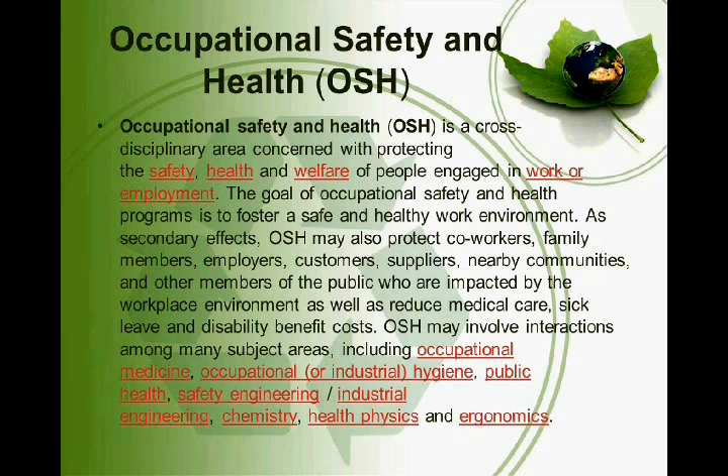Occupational health and safety is a cross-disciplinary area concerned with protecting the safety, health and welfare of people engaged in work or employment. OSH may involve interactions among many subject areas including occupational medicine, occupational hygiene, public health, industrial engineering, chemistry and health physics.

Steps to maintain HSE&S in the industry. There should be a program administration, and the supervisor is the key to safety success. The role of safety coordinator should be chalked out. Accident reporting should always be done. Accident investigations should be thorough.

Periodic workplace surveys like daily, monthly or yearly should be followed. Hazard communication program should be installed. Safety activity reporting should be done. Hazardous waste disposal should be ensured. New employees orientation briefing should be done before they go to the field.

Since 1950, International Labour Organization and World Health Organization have shared a common definition of occupational health. It was adopted by the joint ILO/WHO Committee on Occupational Health at its first session in 1950 and revised in 1995. The ILO published a standard in 2001 which is similar to OHSAS 18001.

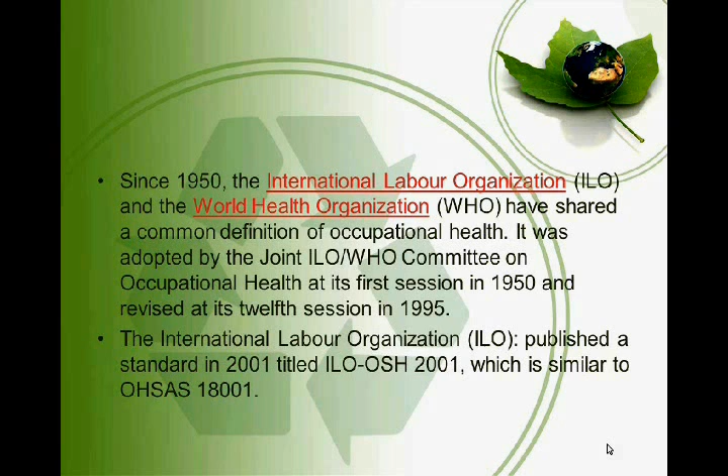We have many government organizations and laws all over the world that ensure that HSE&S are followed by the industries. Some of the very well-known government organizations are Congressional Office of Compliance US, Health and Safety Executive UK, Korea Occupational Safety and Health Agency South Korea.

Likewise, the laws are Indonesian Act number 1/1970 about occupational safety and work 1970, Occupational Health and Safety Act 1991 Australia, and Occupational Safety and Health Act since 1994 in Malaysia.

From rain boots to parachutes to blue jeans and heart machines, there is perhaps no other industry that affects our lives more than the chemical industry. In fact, more than 96% of all manufactured goods are directly touched by the chemical industry. Chemical production has a wide range of hazards requiring different levels of control to keep companies and their communities safe. These hazards range from virtually zero for some products to very serious for others.

The good news is that environmental health, safety, and security programs exist to give businesses a way of verifying that they're manufacturing as efficiently, effectively, and safely as possible. This can include meeting federal regulations or reducing pollution levels. Multinational manufacturers can devote significant resources to implement their programs.

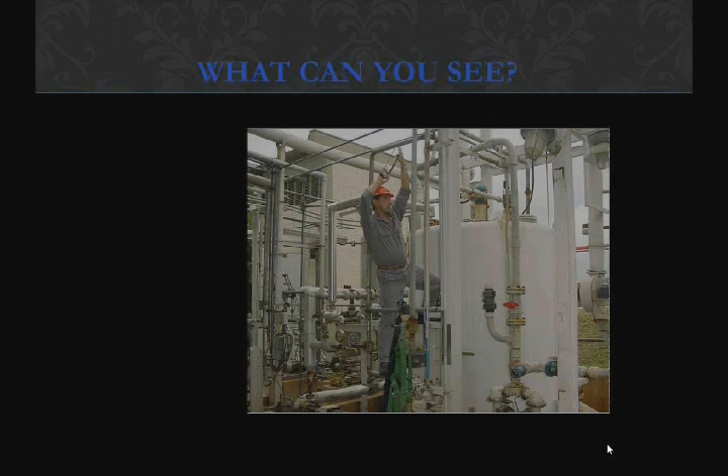Training on behavior-based safety. As we can see a man working in this picture, he's not wearing any safety gloves, safety glasses, his eyes are not on the task, he has no fall protection and he's not wearing any safety shoes.

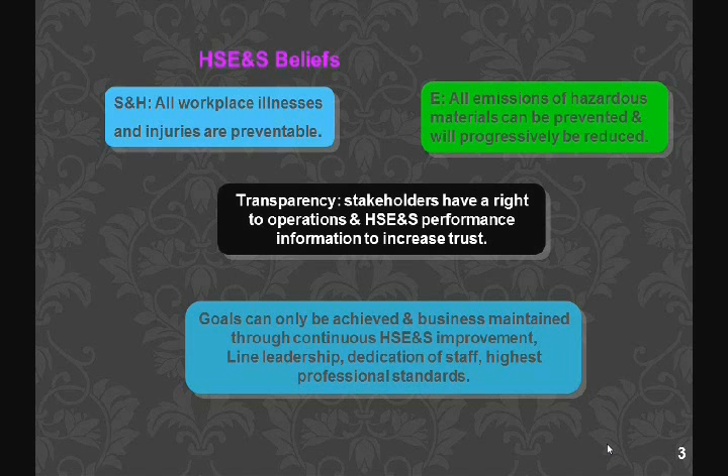Now breaking up HSE and S. S and H mean all workplace illness and injuries are preventable. E informs us that all emissions of hazardous materials can be prevented and will progressively be reduced. Transparency: stakeholders have a right to operations and HSE&S performance information to increase trust. Goals can only be achieved and business maintained through continuous HSE&S improvement, line leadership, dedication of staff, highest professional standards.

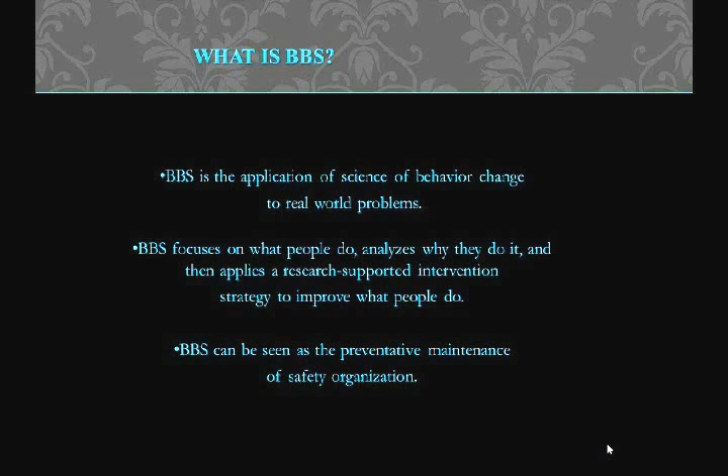What is BBS? BBS is the application of science of behavior change to real-world problems. BBS focuses on what people do, analyzes why they do it, and then applies a research-supported intervention strategy to improve what people do. BBS can be seen as the preventive maintenance of safety organization. What is behavior? Behavior is the way people act or what people actually do. It is the action or reaction of something under specified circumstances.

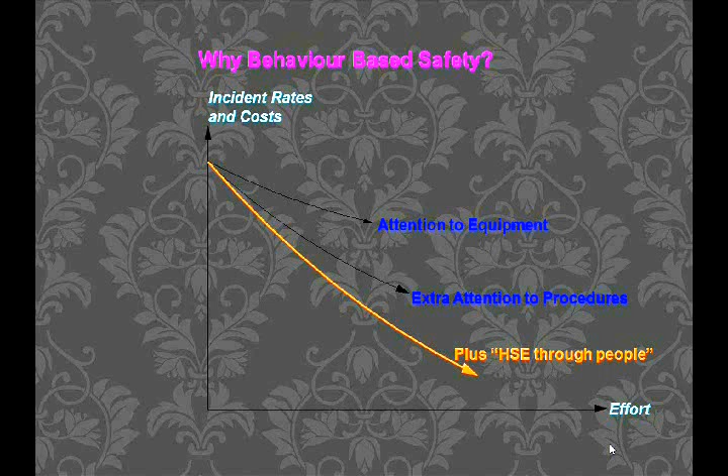Why behavior-based safety? It is for us to minimize unsafe acts and unsafe conditions, to eliminate accidents, and it is a requirement of a safer and healthy workplace. As we can see in this graph, attention to equipment decreases the incident rates. Extra attention to the procedures given also decreases the incident rates and costs. But if we attach all of these things with HSE through people, incident rates and costs are minimized with a lot of effort.

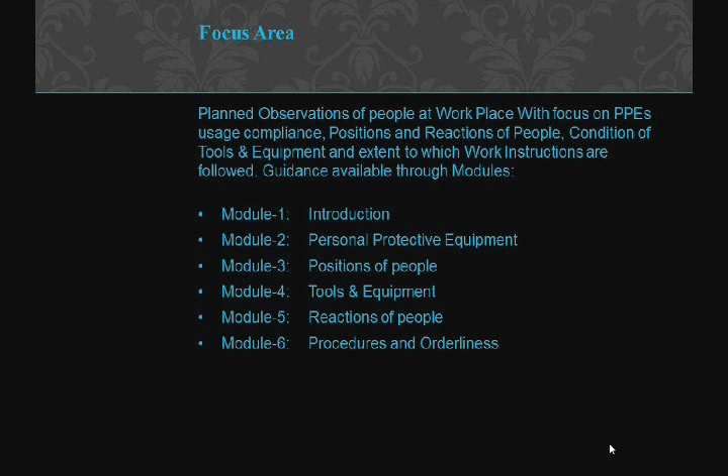Module 1, the introduction of behavior-based safety system. Our objective is the elimination of unsafe acts to eliminate injuries by becoming a skilled observer. Key principle: all injuries and occupational illness can be prevented. Safety is our responsibility. Safety has high priority. Don't sacrifice safety for improved production and/or reduced time loss.

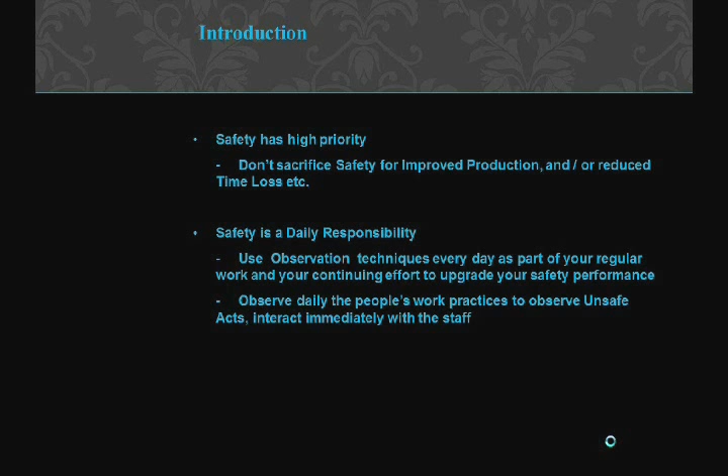Safety is a daily responsibility. Use observation techniques every day as part of your regular work and your continuing effort to upgrade your safety performance. Observe daily the people's work practices to observe unsafe acts. Interact immediately with the staff. Now this is the observation cycle in which first we decide, then stop, observe, act and report.

Use safety observation card and/or raise learning event electronically. Don't mention the name of the person involved. Interaction with persons involved is a must. Report for actions to avoid recurrence and general communication to all concerned. Observation measures performance. Measure your job performance and your area's safety performance by observing your employees while they work.

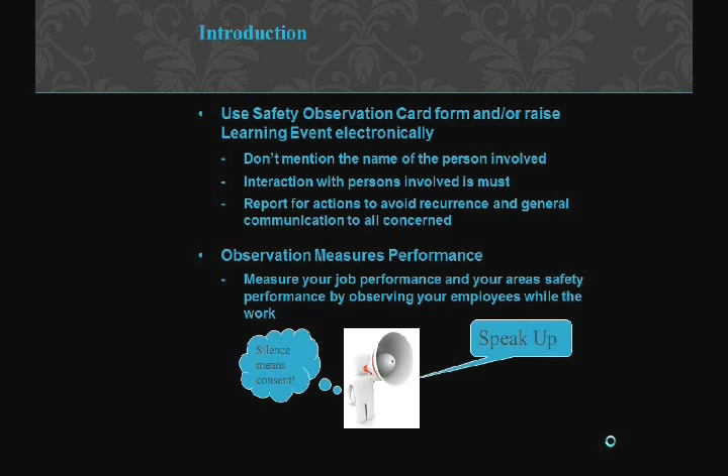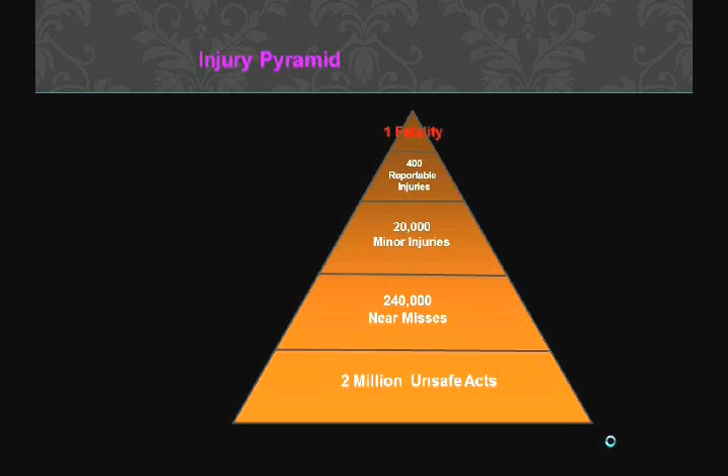This pyramid shows that 2 million unsafe acts and 240,000 near misses and 20,000 minor injuries and 400 reportable injuries lead to one fatality. Module 2 is personal protective equipment.

Safety is a line management responsibility. All injuries are preventable. 12% of injuries are caused due to failure to use PPE. PPE is a barrier between the person and the hazard. PPE protects people from unnecessary exposure to hazards. Failure to use PPE reflects the attitude of the person and he may ignore other safe practices.

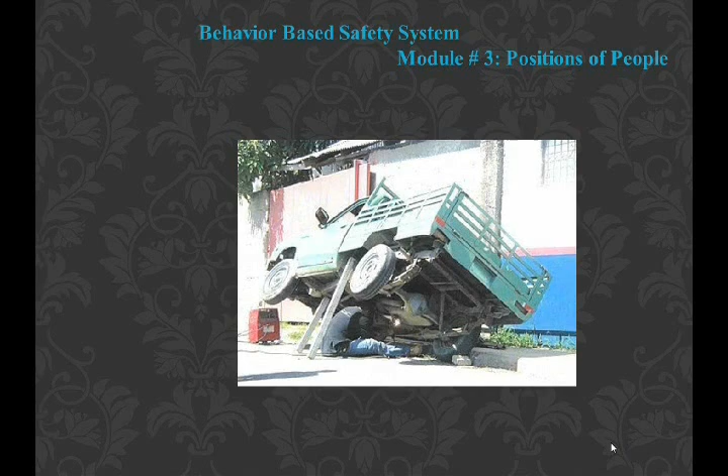Module 3, Positions of people. Observe people at work and ask yourself: can their position lead to an injury? If it does, then approach them positively and ask them. Injury causes and potential hazards.

Striking against or being struck by objects, caught in, on or between objects, contact with rotating equipment, falling at same level or falling to different level, contacting temperature extremes, contacting electric currents, inhaling, absorbing through the skin or swallowing a hazardous substance, overexertion while lifting, pulling, pushing or reaching.

Module 5, Reactions of people. As the observation cycle, we should see and decide. Free mind, dedicated round to observe unsafe acts, unsafe conditions, no other activity. Failure to use PPE is an unsafe act. Unsafe conditions are the result of someone's unsafe act. Be ready to observe people for all evaporative unsafe acts within 10 to 30 seconds.

And then observe. Stop at work location. Observe all individuals from head to toe. Be ready to observe evaporative unsafe acts. Observe for possible injuries from potential hazards, that is, injury causes. Do remember, silence is consent. Being personal should be avoided, being harsh or being disrespectful, blaming others.

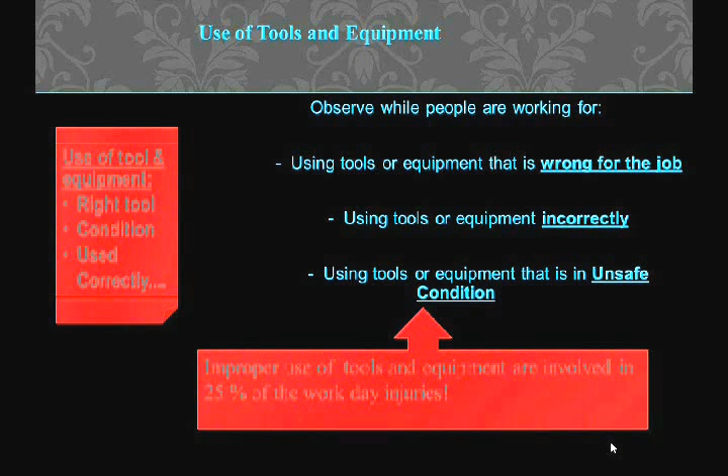Module 4. Tools and equipment. Observe while people are working for using tools or equipment that is wrong for the job, using tools or equipment incorrectly, using tools or equipment that is in unsafe condition.

Here's an example. One of the experienced maintenance workers was using a large screwdriver as a chisel and pry bar. The screwdriver shaft snapped as he was using all his force and body weight to attempt to get the tip of the screwdriver between a pump mount and its concrete pad. You can see the results. There were 37 stitches, 4 lost work days, 25 restricted work days.

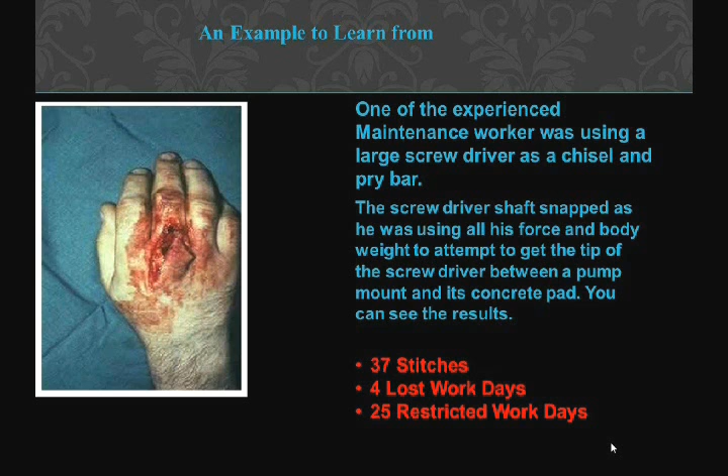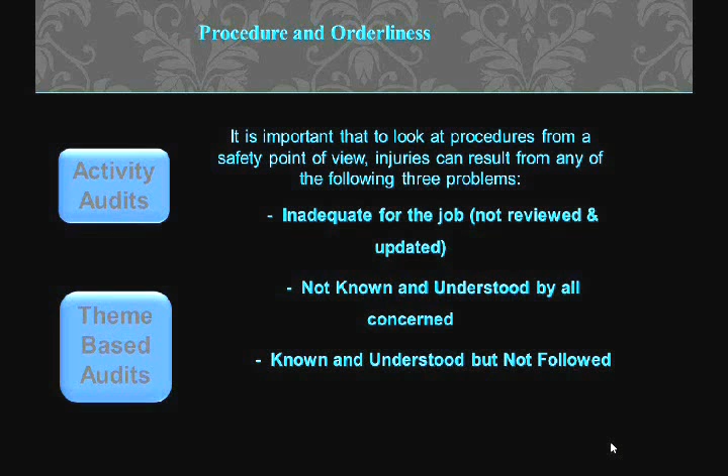Module 6. Procedure and Orderliness. It is important to look at procedures from a safety point of view. Injuries can result from any of the following 3 problems: inadequate for the job, not known and understood by all concerned, known and understood but not followed.

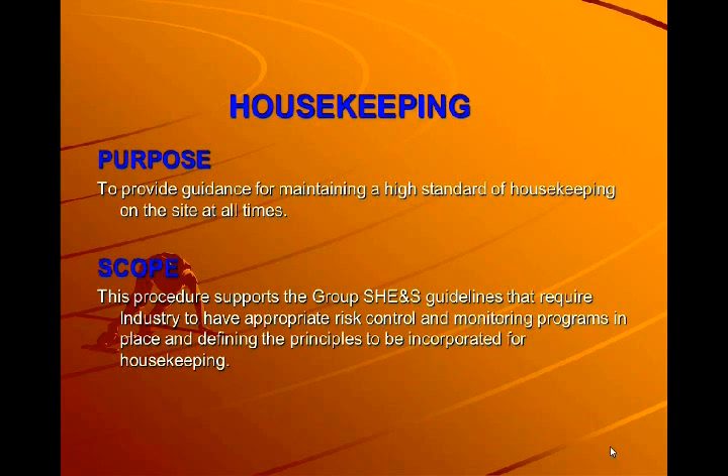Advantages of good housekeeping. The purpose is to provide guidance for maintaining a high standard of housekeeping on the site at all times. This procedure supports the group SHE&S guidelines that require industry to have appropriate risk control and monitoring programs in place and defining the principles to be incorporated for housekeeping.

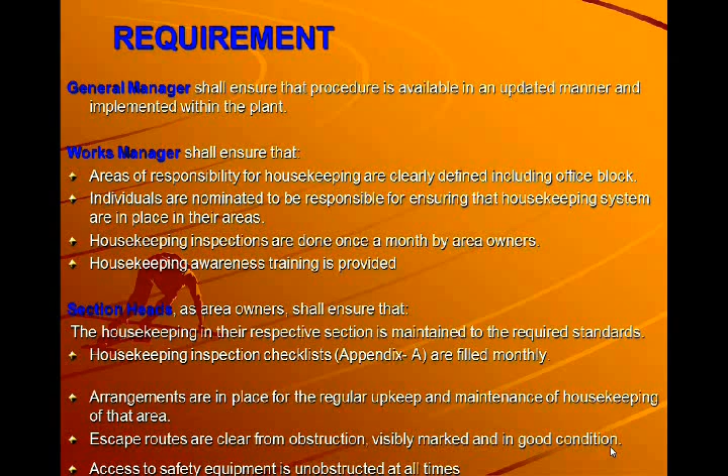The requirements are: there should be a general manager who should ensure that the procedure is available in an updated manner. There should be a works manager who should be put up to task, section heads, human resource manager, area managers. The benefit of this program is good housekeeping can help us to do the job safely, minimizing carelessness and clutter, two common causes of accidental injuries and fire. Spend less time looking for things and fighting frustration.

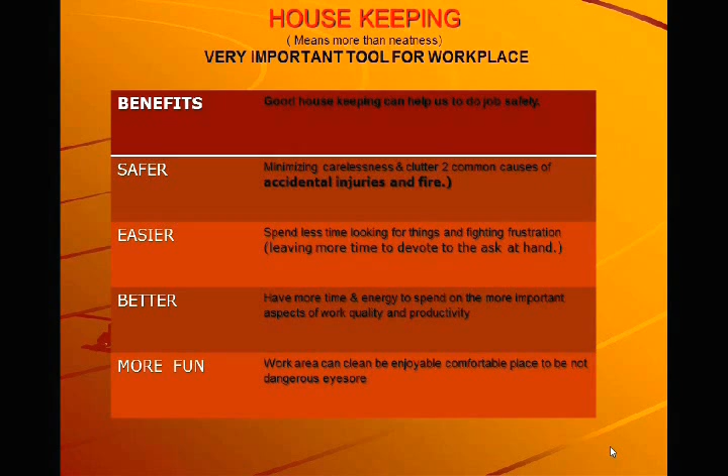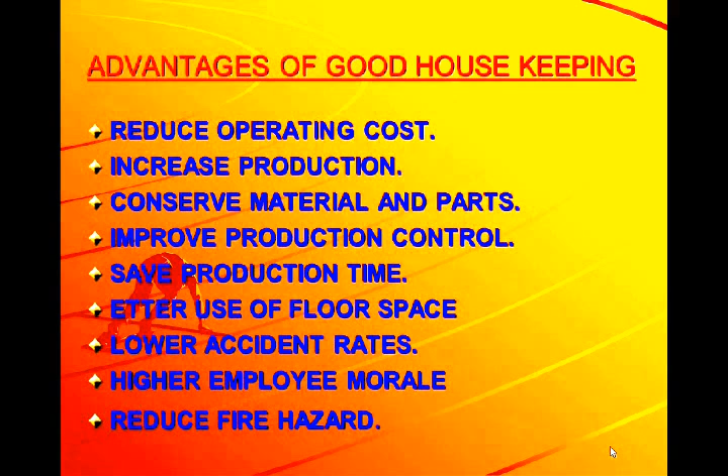Have more time and energy to spend on more important aspects of work quality and productivity. The work area can be a clean, enjoyable, comfortable place to be, not dangerous. Advantages of good housekeeping are reduced operating cost, increased production, conserve material and parts, improve production control, save production time, better use of floor space, lower accident rates, high employee morale, reduce fire hazard.

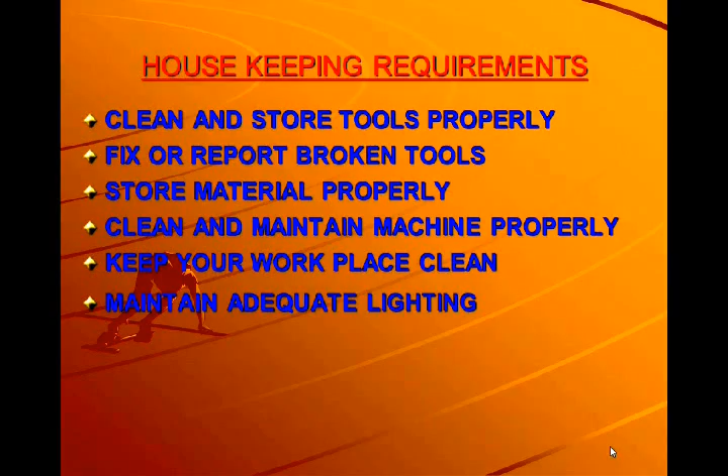Clean and store tools properly, fix or report broken tools, store material properly, clean and maintain machines properly, keep your workplace clean, maintain adequate lighting. Next section is permit to work. The salient features are: the person doing the job and the people around are saved by it. The document helps in ensuring accountability and responsibility. This page is as good as the people who are following its checklist. Work permit may save a life or cause death.

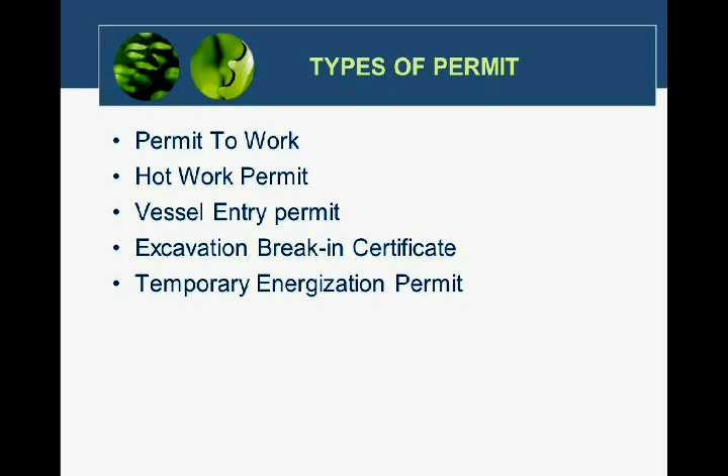The types of permits are: permit to work, hot work permit, vessel entry permit, excavation break-in certificate, temporary energization permit, scaffolding certificate, and many others. The authorities involved are: the issuing authority, who is the owner with operating control. There is the receiving authority, which is responsible for the execution of the specified job, and there is the acceptor, who is any permanent employee, nominee of the executor or receiving authority.

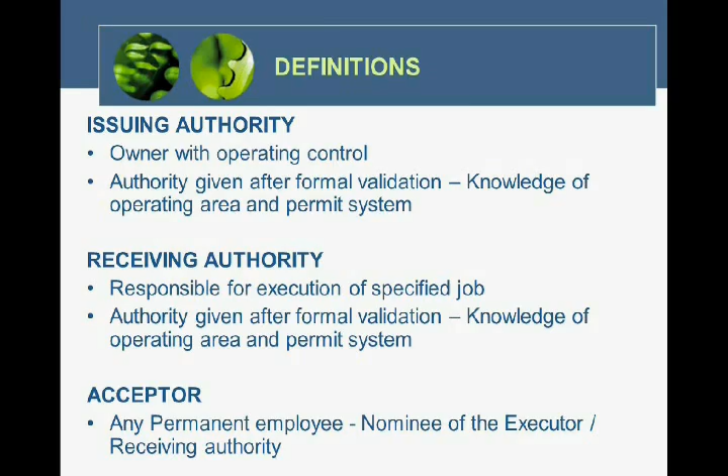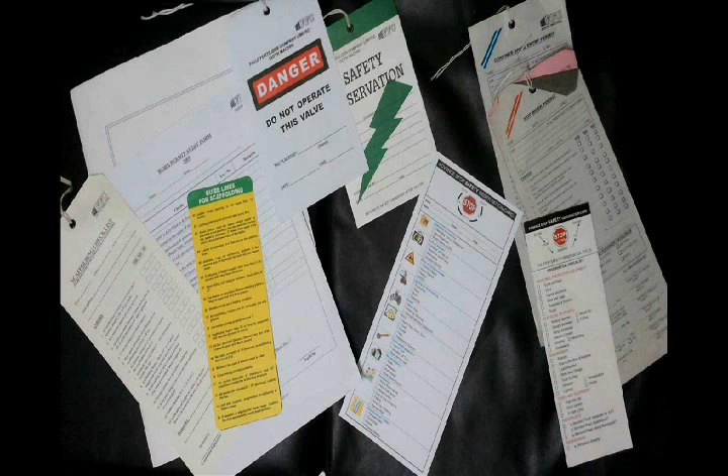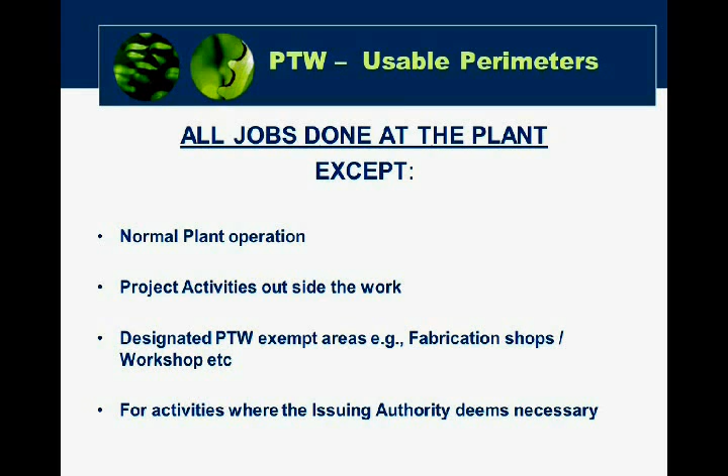These are the types of permits, which are hot permit, as we can see here, or confined space entry permit, scaffolding, and many other types. All jobs done at the plant use permits except normal plant operation, project activities outside the work, designated PTW exempt areas, e.g. fabrication shops, workshop, for activities where the issuing authority deems necessary.

Permit to work has a duration and validity of 7 days, which is extendable to another 7 days. Hot work permit is used for welding, cutting, grinding, drilling jobs, and it is valid for 24 hours only. Vessel entry permit is the permit used for all confined space entry, 1 meter depth, hazardous fumes, oxygen deficiency, not normal operating area. This is again valid for 24 hours.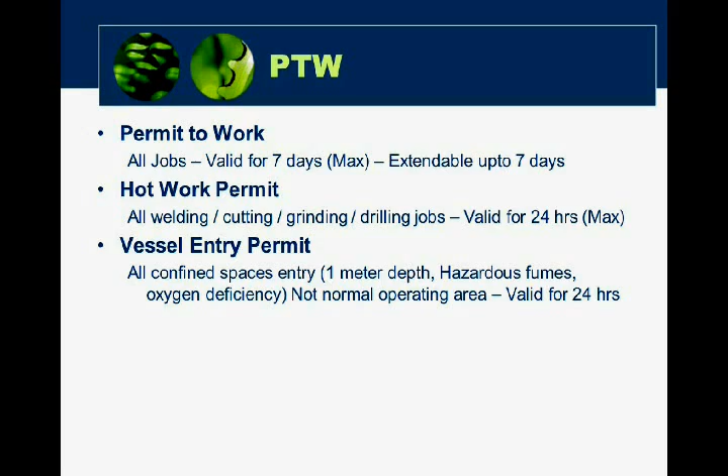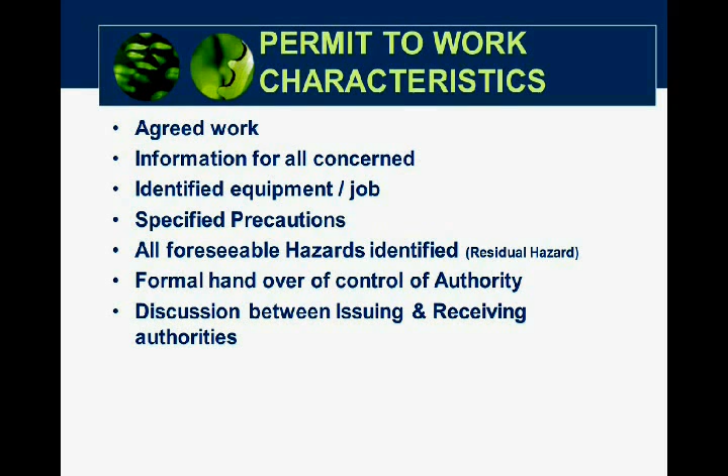The characteristics of permit to work are that it is agreed work, information for all concerned, identified equipment job, specified precautions, all foreseeable hazards identified, formal handover of control of authority, discussion between issuing and receiving authorities.

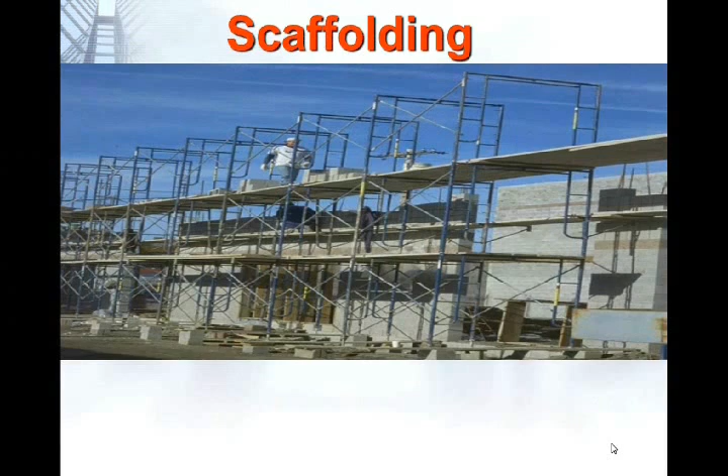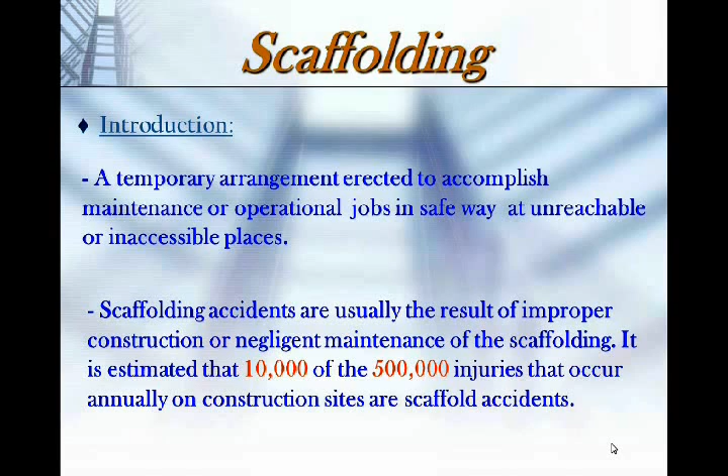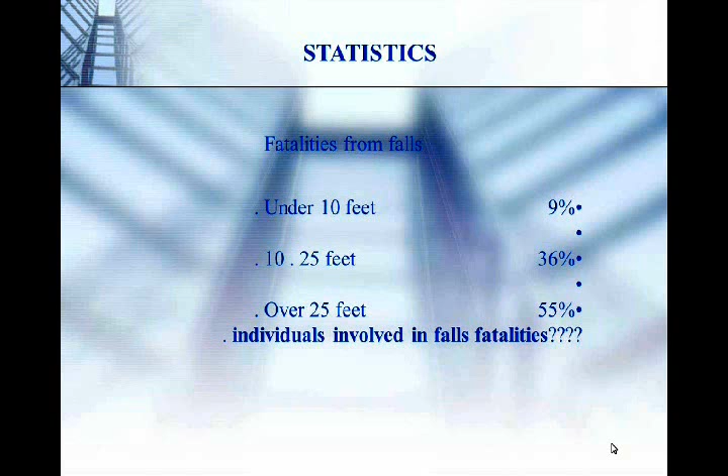Scaffolding. Scaffolding is a temporary arrangement erected to accomplish maintenance or operational jobs in a safe way at unreachable or inaccessible places. Scaffolding accidents are usually the result of improper construction or negligent maintenance of scaffolding. Statistics of scaffolding and the fatalities.

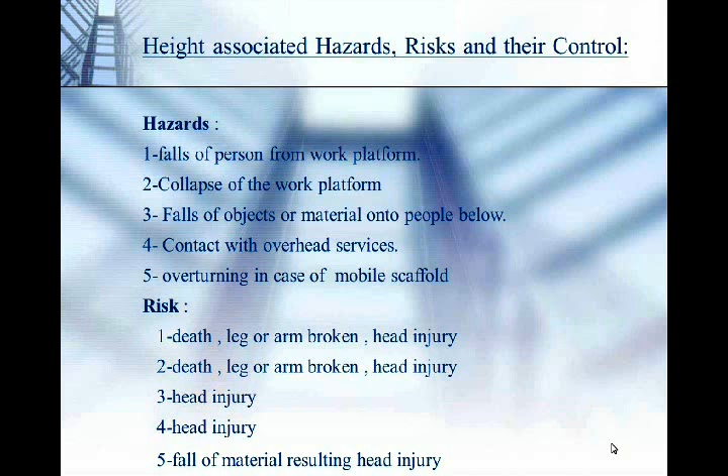Height associated hazards, risk and their control. Hazards: fall of a person from work platform, collapse of the work platform, falls of object or material onto people below, contact with overhead services, overturning in case of mobile scaffold. The risks: death, leg or arm broken, head injury, fall of material resulting in head injury.

Control: use safety harness, net installation below platform, proper inspection of joints and material by a skilled person, properly barricade the area, net installation below scaffolding, make sure that the distance is safe from overhead electric and process lines. No worker or material should remain on scaffold before turning of tower.

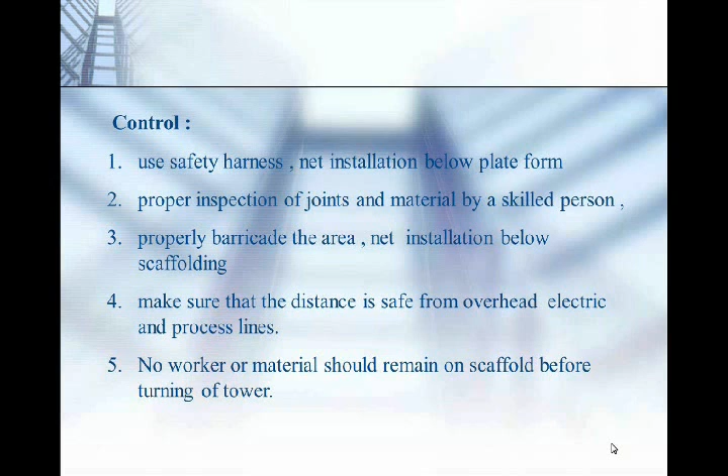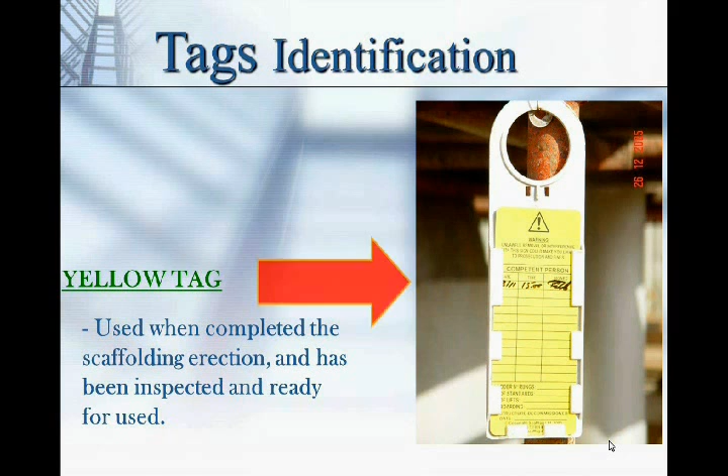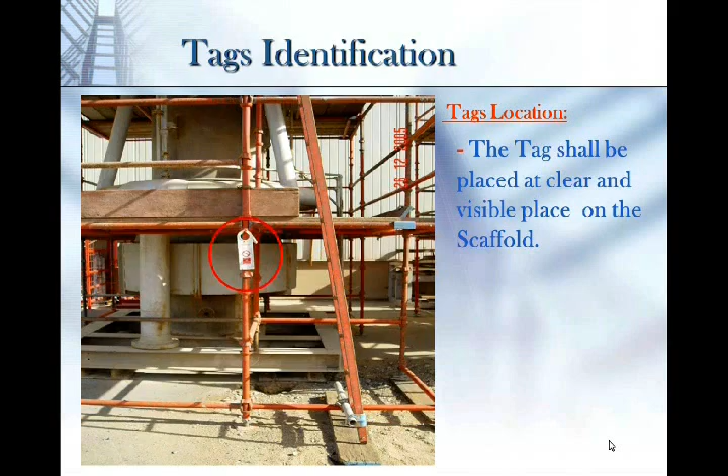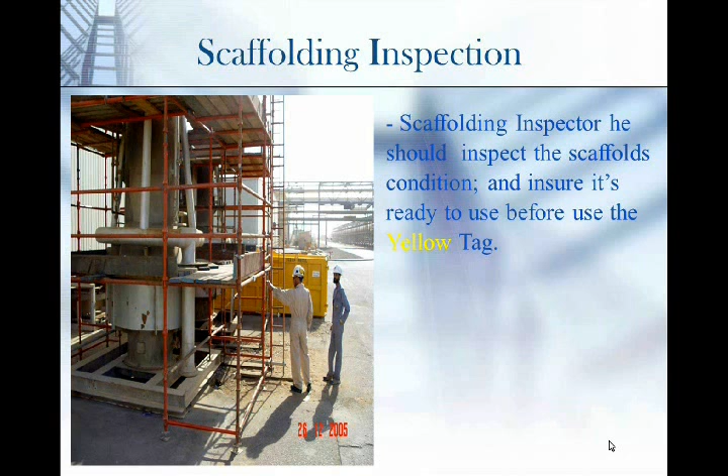Tags identification. The red tag means do not use. Yellow tag is used when the scaffolding erection is completed, has been inspected and is ready for use. The tag shall be placed at a clear and visible place on the scaffold. This red tag is do not use scaffold. The scaffolding inspector should inspect the scaffold's conditions and ensure it's ready for use before the use of the yellow tag.

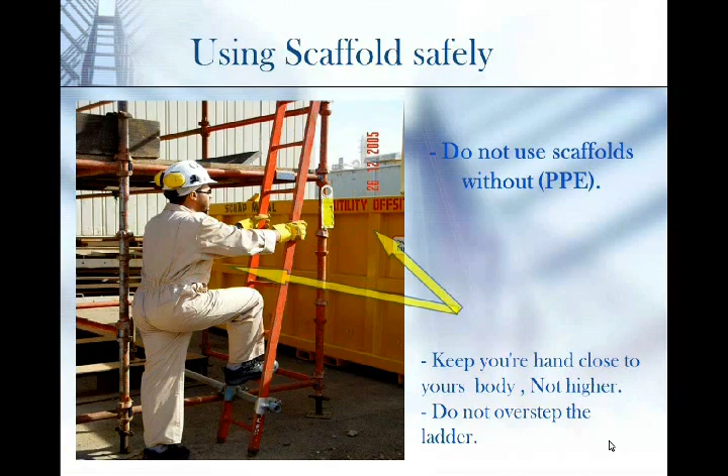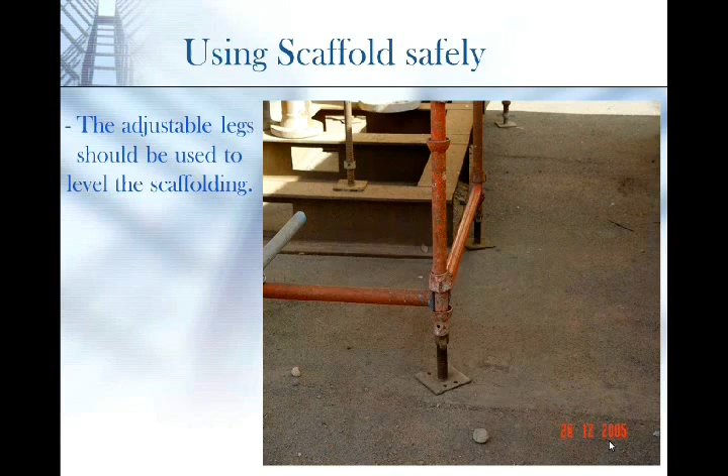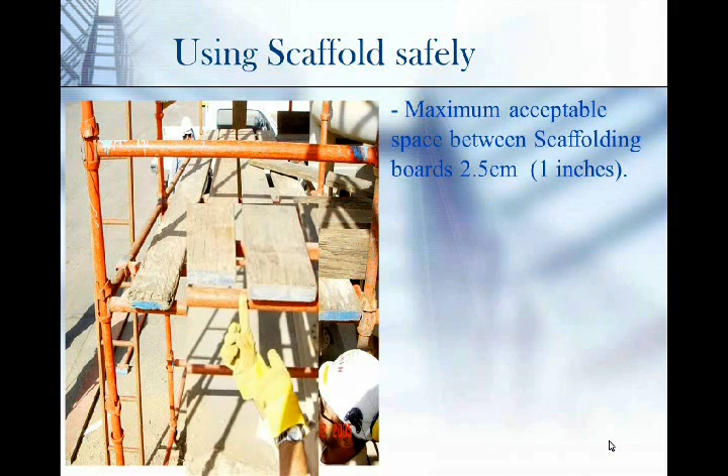Do not use scaffoldings without PPE. Keep your hands close to your body, not higher. Do not overstep the ladder. Avoid falling, use safety harnesses. The adjustable legs should be used to level the scaffolding. And this is an example of a safe footing. Maximum acceptable space between scaffolding boards is 2.5 centimeters.

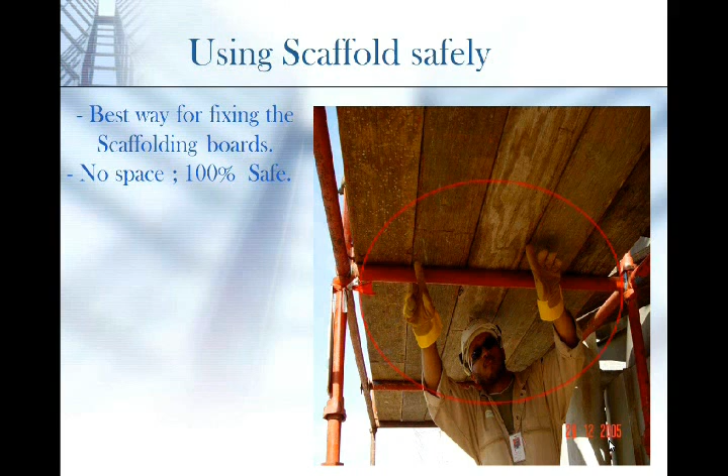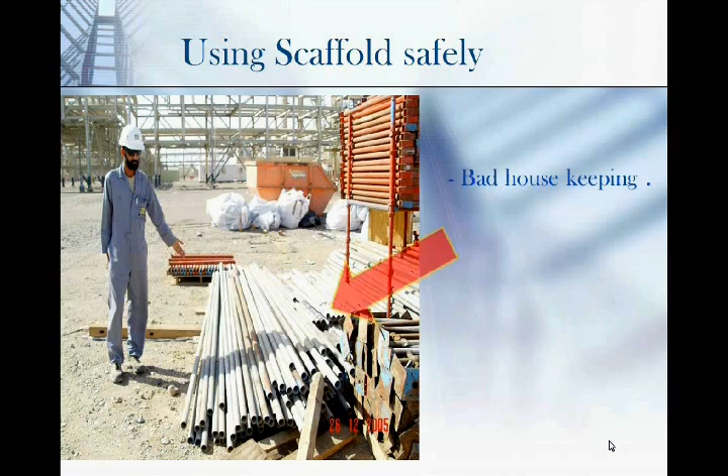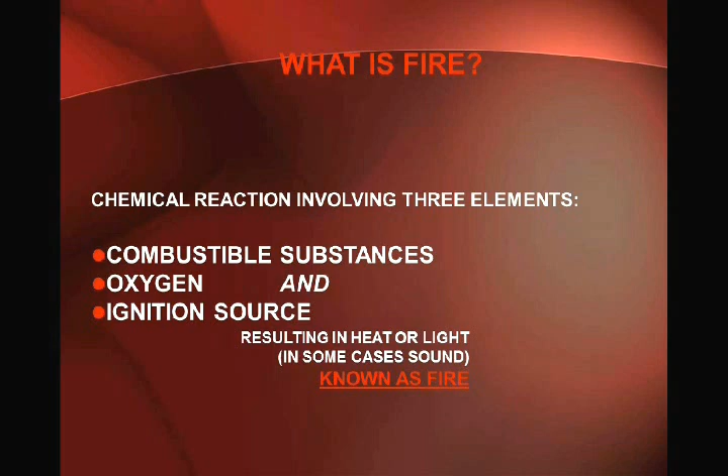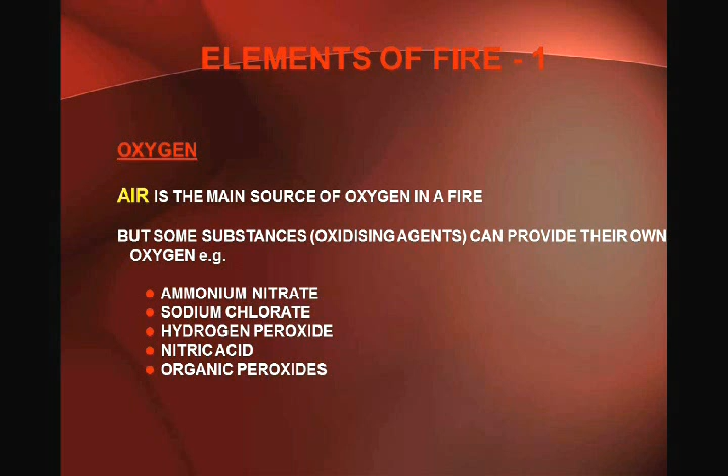Basic firefighting. Fire prevention. Objectives: to know how fire starts, fire prevention, and lastly fire protection, loss control. What is fire? Fire is a chemical reaction involving three elements: combustible substances, oxygen, and ignition source. Elements of fire. Number 1, oxygen. Air is the main source of oxygen in a fire, but some substances, oxidizing agents, can provide their own oxygen. For example, ammonium nitrate, sodium chlorate, hydrogen peroxide.

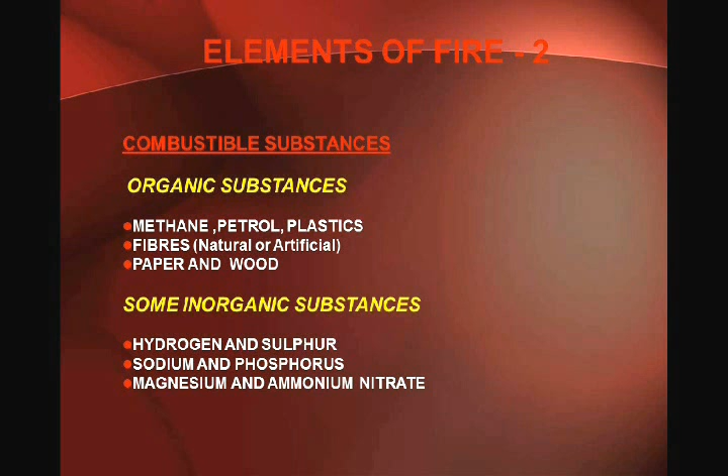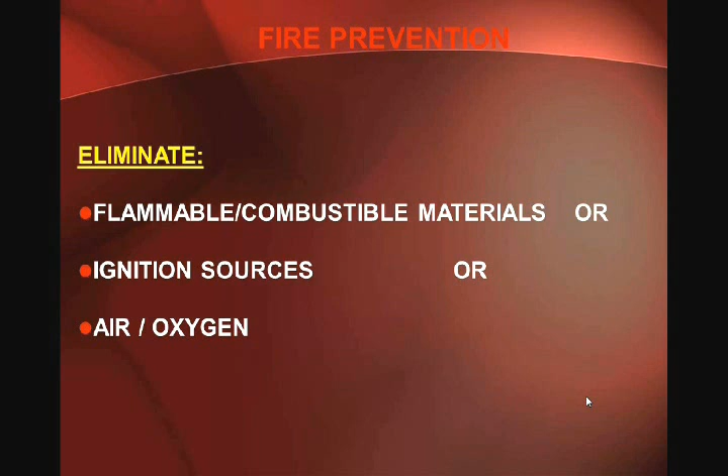Fire prevention. First of all, we have to eliminate flammable combustible materials or ignition sources or air or oxygen. Fire prevention can be done through good housekeeping, reduced storage of flammable material, proper storage of flammable material, elimination of ignition sources, educate and train people, carry out drills, work permit procedures, modification control procedure.

Protection from fire, loss control can be done through fire alarms, detection systems, first aid, training drills, firefighting facilities, building materials, escape routes, emergency lighting, structure protection, protection of cables and equipment.

Here are some definitions. Ignition temperature: the lowest temperature at which the substance will ignite spontaneously is called ignition temperature. The second thing is flash point: the minimum liquid temperature at which sufficient vapor is given off to form a mixture with air which is capable of ignition under prescribed test conditions.

Upper limit of flammability is the maximum concentration of fuel in air which will permit the spread of flame from a small local source of ignition. The lower limit of flammability is the minimum concentration of the fuel in air which will permit the spread of flame from small local sources of ignition.

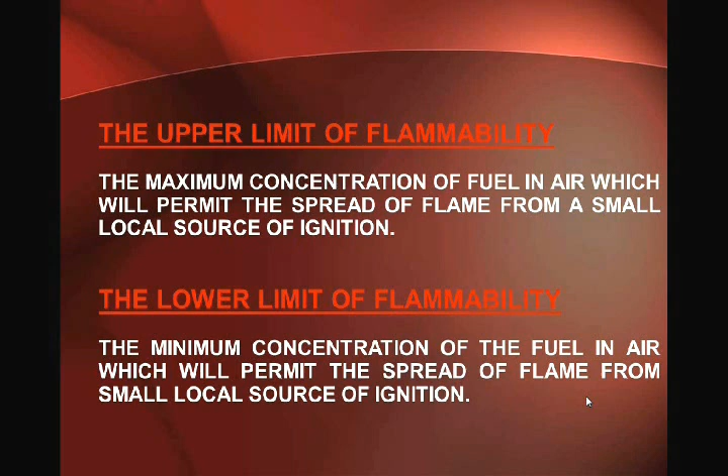Good housekeeping results in good fire prevention. Avoid using open electric heaters, keep clothing etc. away from heaters, store paper in cupboard, not on desk, keep escape routes clear. Fire extinguishers. There are 5 classes of extinguishers. Understand fire extinguisher types, operating procedures, capabilities, and limitations. Understand basic firefighting concepts, RACE and PASS.

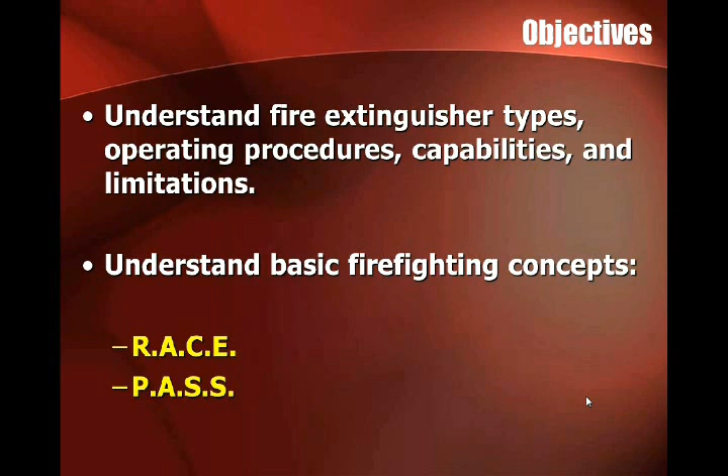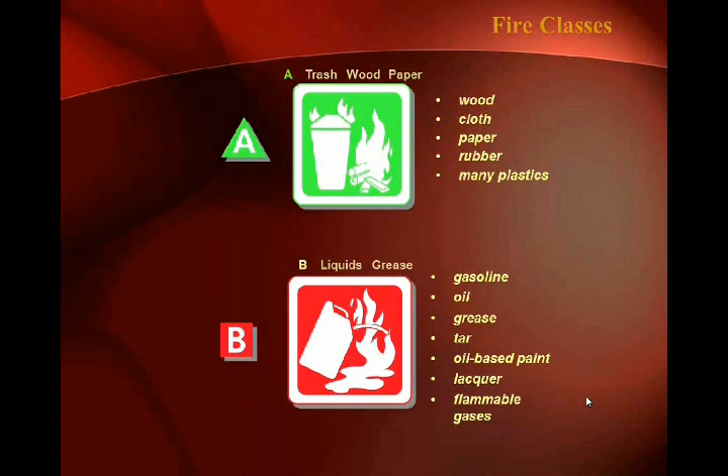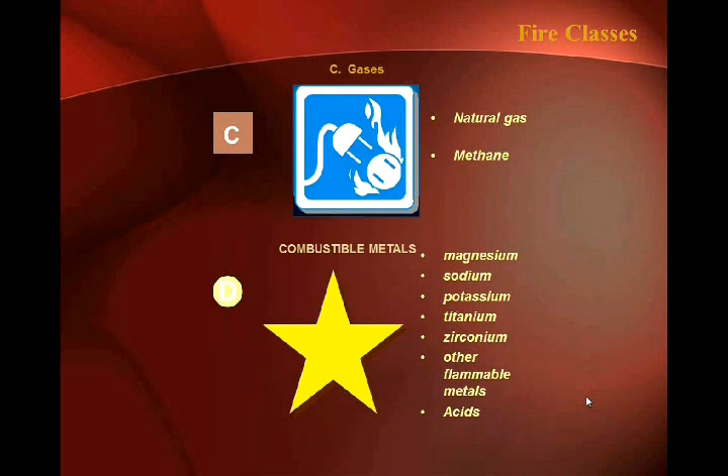These are the 5 categories. In category A, the fire of wood, cloth, paper, rubber, and many plastics is considered. In class B, gasoline, oil, grease, tar, and flammable gases. Class C is natural gas and methane. Class D is combustible metals, magnesium, sodium, potassium, titanium, and acids. Class E is electrical equipment fire. Energized electrical equipment is included in this.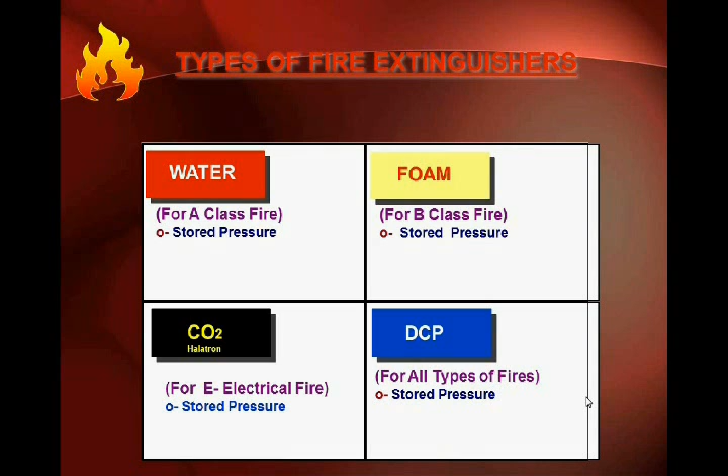Fire emergency response. The 2 types are RACE. R stands for rescue, A for alarm, C to contain, and E to extinguish the fire. The other type is PASS. Pull the pin, aim low at the base of flames, S for squeeze the handle, and the second S is for sweep side to side.

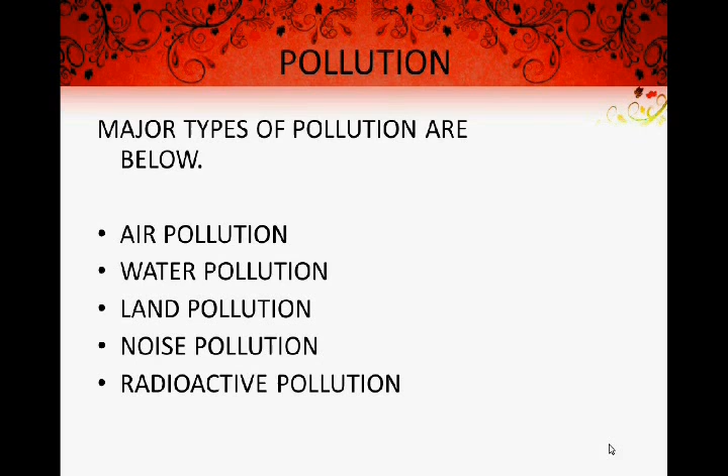If you discover a fire, do raise a fire alarm. Try to extinguish the fire with a suitable fire extinguisher. If not familiar with its use or you do not feel you can extinguish it, evacuate to your assembly point. Environmental safety. Pollution. Major types of pollution are air pollution, water, land, noise, and radioactive pollution.

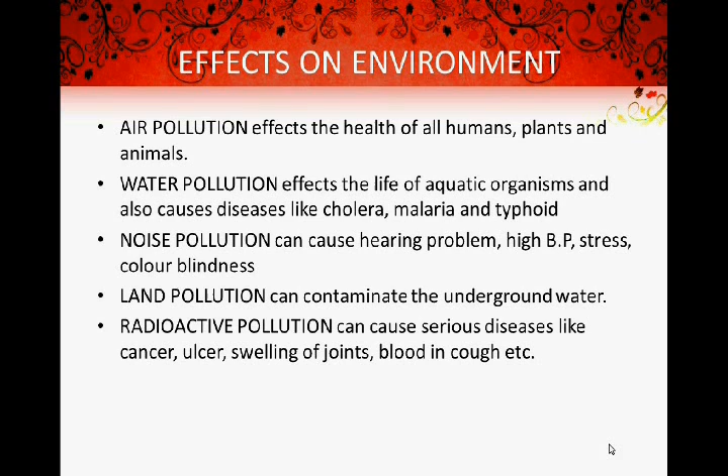Effects on environment. Air pollution affects the health of all humans, plants, and animals. Water pollution affects the life of aquatic organisms and also causes diseases like cholera, malaria, and typhoid. Noise pollution can cause hearing problems, high blood pressure, stress, and color blindness. Land pollution can contaminate the underground water, whereas radioactive pollution can cause serious diseases like cancer, ulcer, swelling of joints, blood in cough, and others.

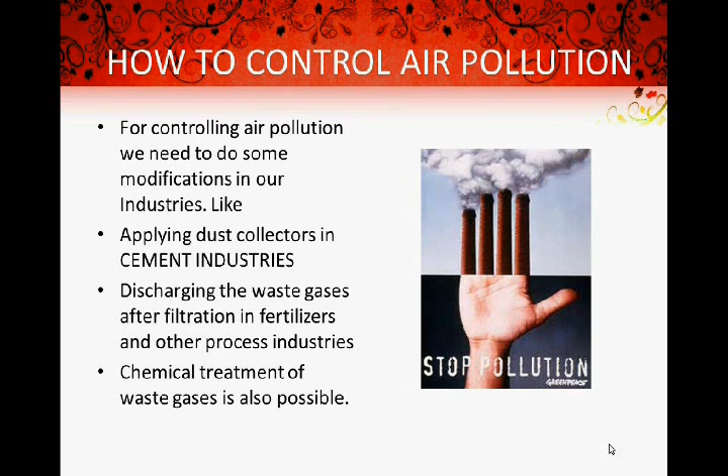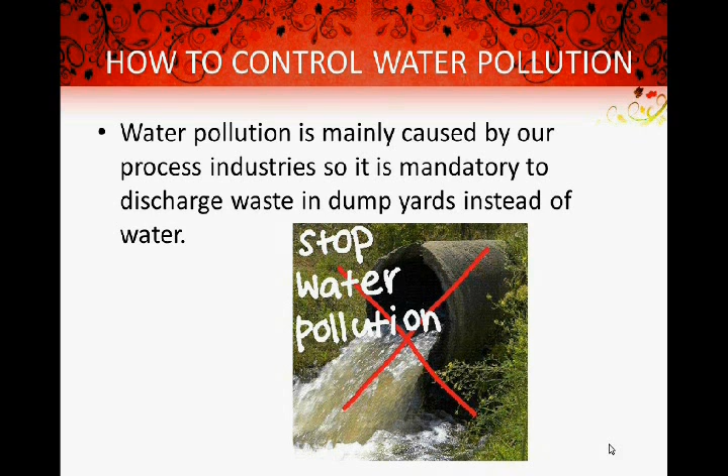How to control air pollution? For controlling air pollution, we need to do some modifications in our industries, like applying dust collectors in cement industries, discharging the waste gases after filtration in fertilizers and other process industries. Chemical treatment of waste gases is also possible. How to control water pollution? Water pollution is mainly caused by our process industries, so it is mandatory to discharge waste in dump yards instead of water.

How to control land pollution? Recycle waste such as plastic instead of burying it in landfills. Use the organic waste to produce methane for energy. Separate heavy metals. Use high temperature incineration to get rid of harmful man-made organic chemicals like PCBs and pesticides. Force oil companies and mining companies to adhere to environmental standards and clean up.

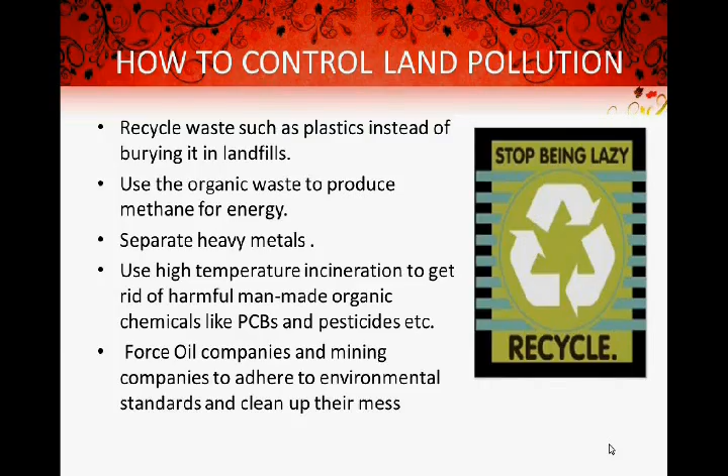Organizations for Environmental Safety: IPCC, United Nations Environment Programme, UNEP, Environmental Protection Agency, EPA, Pakistan. Security awareness for men and material. Security awareness is the knowledge and attitude of members of an organization regarding the protection of the physical and especially information assets of that organization.

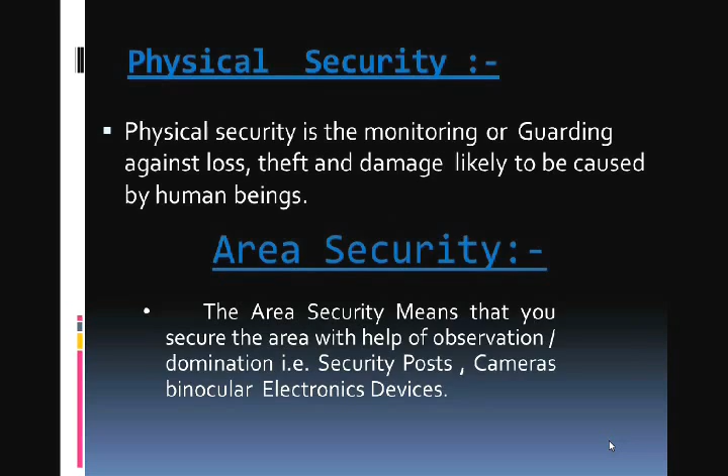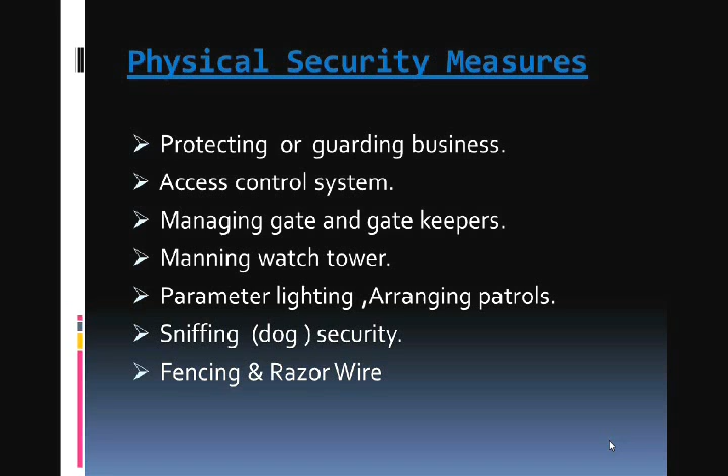Physical security is the monitoring or guarding against loss, theft, and damage likely to be caused by human beings. Area security means that you secure the area with the help of observation, domination, i.e. security posts, cameras, binoculars, electronic devices. Protecting or guarding the business: access control systems, managing gates and gatekeepers, manning watchtowers, perimeter lighting, arranging patrols, sniffing dogs, fencing and razor wire.

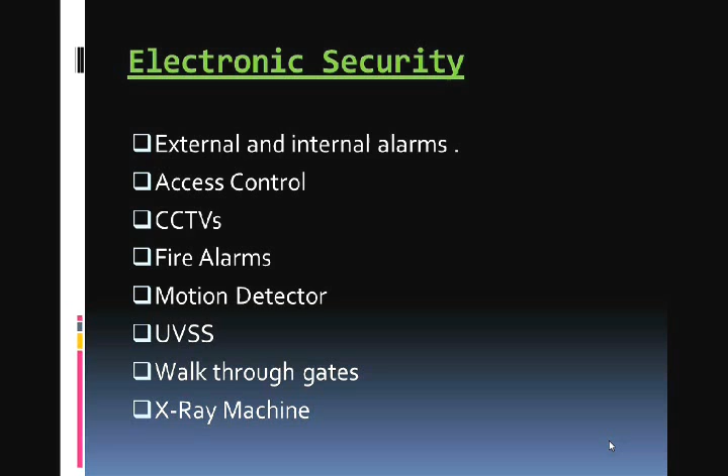Types of security are security of man and security of material. Electronic security includes external and internal alarms, access control, CCTVs, fire alarms, motion detectors, UVSS, walk-through gates, X-ray machines. There should be a strong check on identity documents, identity card, passes, permits, gate passes for store items and others. Admission of visitors should be properly regulated: checking of ID cards, reason of visit, register, they should be escorted, return passes, and temporary passes.

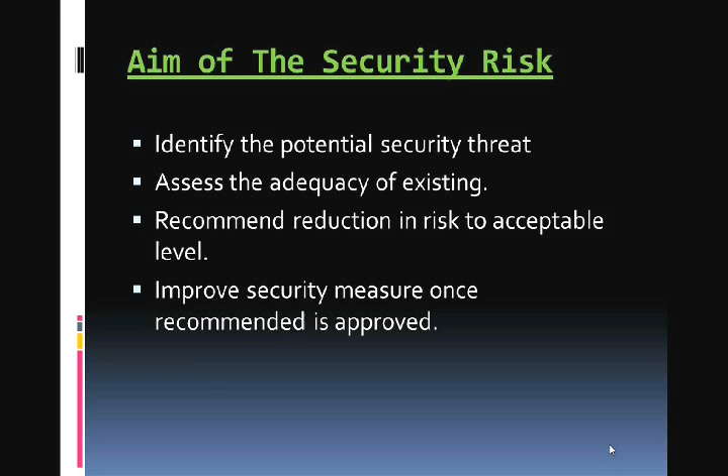Risk means a real or perceived threat to a person, organization, or installation. Aims of the security risk assessment: identify the potential security threat, assess the adequacy of existing measures, recommend reduction in risk to an acceptable level, improve security measures once the recommendation is approved. What can risk assessment do? Provide a sound basis for security decisions, prevent occurrence of any incident, help to strike a balance between threat and cost of security measures. No individual can guarantee 100%, but we get as close to it as possible through alternates, alertness, and sound security systems.